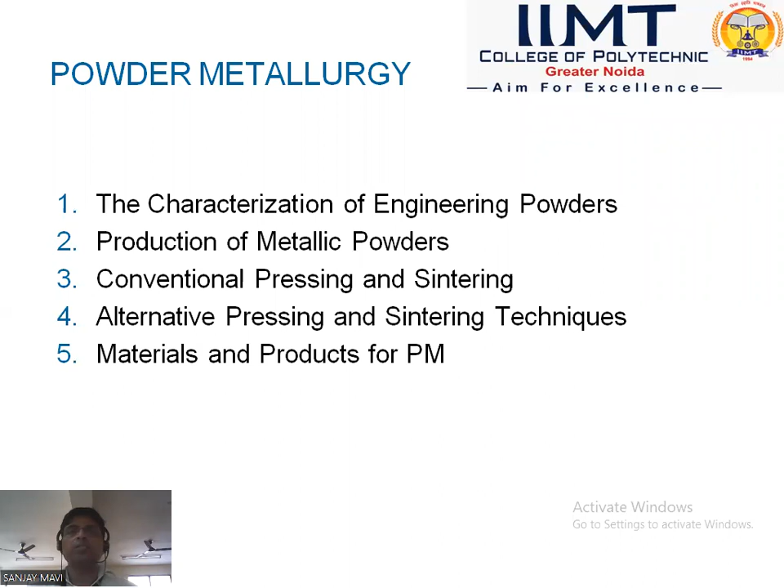Today I will discuss powder metallurgy. The content of today's lecture is the characterization of engineering powders, production of metallic powders, conventional pressing and sintering, alternative pressing and sintering techniques, and at last, materials and products for PM, that is powder metallurgy. Let us discuss all this content one by one.

First of all, what is powder metallurgy? Powder metallurgy is a manufacturing process in which materials, components or parts are made from metal powders. It is a manufacturing process like other manufacturing processes, but here we convert the raw material, that is metal, into powder, then get the final product by the powder metallurgy process.

If we talk about the importance of powder metallurgy, or why we need it, the parts produced by powder metallurgy can be mass produced to net shape, near net shape, or accurate shape. By doing this, we eliminate or reduce the need for subsequent machining. If we produce the part almost in its accurate shape, the other operations needed to bring it into final shape will be eliminated.

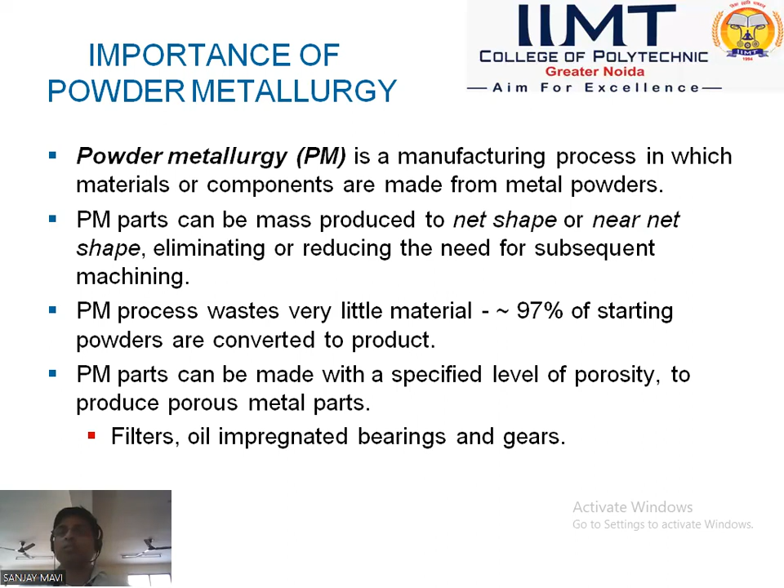Certain metals that are difficult to fabricate by other methods can be easily manufactured by powder metallurgy. For example, the tungsten filaments which we use in bulbs are produced by powder metallurgy. Some alloys, or combinations of alloys and ceramics, called cermets, meaning materials produced from ceramics plus metals, are made by powder metallurgy or PM.

The PM production methods can be automated for economical production. If we introduce automation in PM production, it will be more economical.

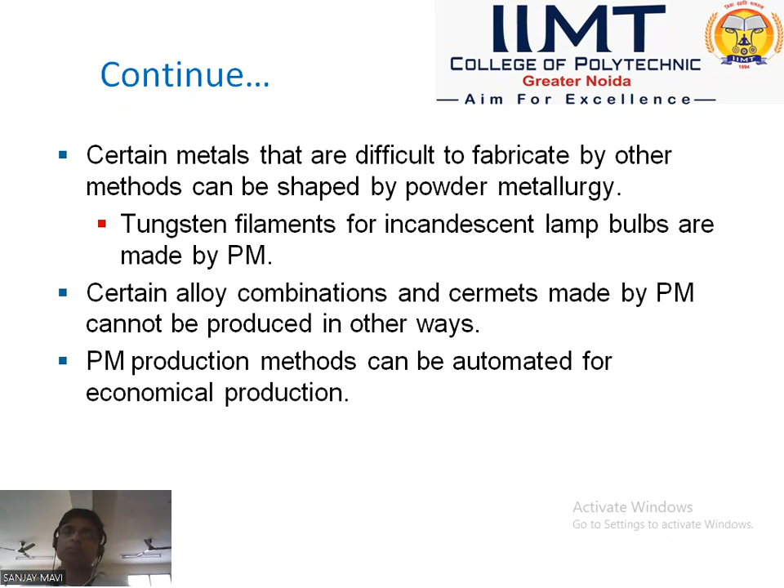Now come to the powders. As powder metallurgy involves powders, let us talk about engineering powders. What is an engineering powder? Powder can be defined as a finely divided particulate solid. These engineering powders include metals and ceramics.

Now come to the geometrical features of engineering powders. These are particle size, meaning the powder matter is made up of particles which have a certain size; particle shape, which is the shape of that particle; and the next is surface area of the particle.

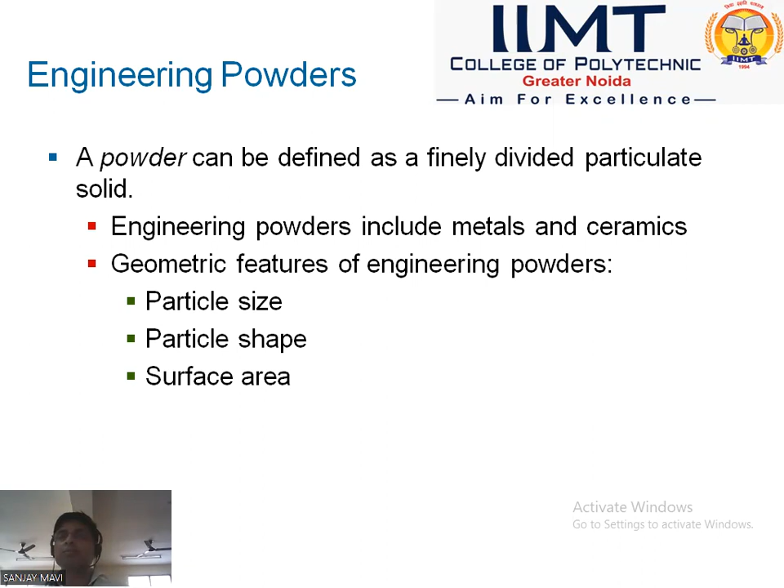The particle shapes in powder metallurgy may be spherical, rounded, cylindrical, spongy, acicular, flaky, cubic, or aggregated. These are all the shapes of the particles that this metallic powder is made up of.

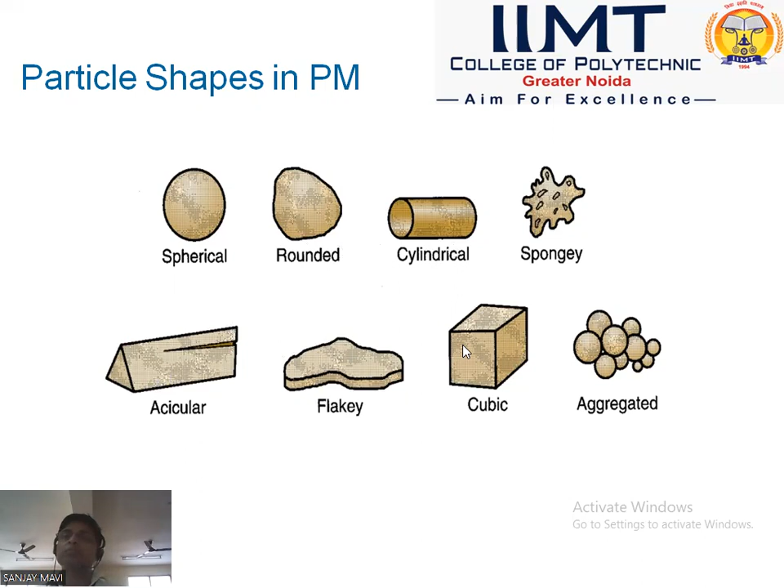Now talk about interparticle friction and powder flow. This is very important in powder metallurgy. Interparticle friction is the friction between the particles of the powder, and it is important because this powder is used to produce the final product. Friction between particles affects the ability of a powder to flow readily and pack tightly. A common test of interparticle friction is the angle of repose, formed by a pile of powder poured from a narrow funnel.

You can see this test here. We have a funnel and we put the metal powder into this funnel and collect it below. The pile of powder makes an angle, called the angle of repose. A larger angle of repose means the interparticle friction is greater; if the angle is smaller, the interparticle friction will be smaller.

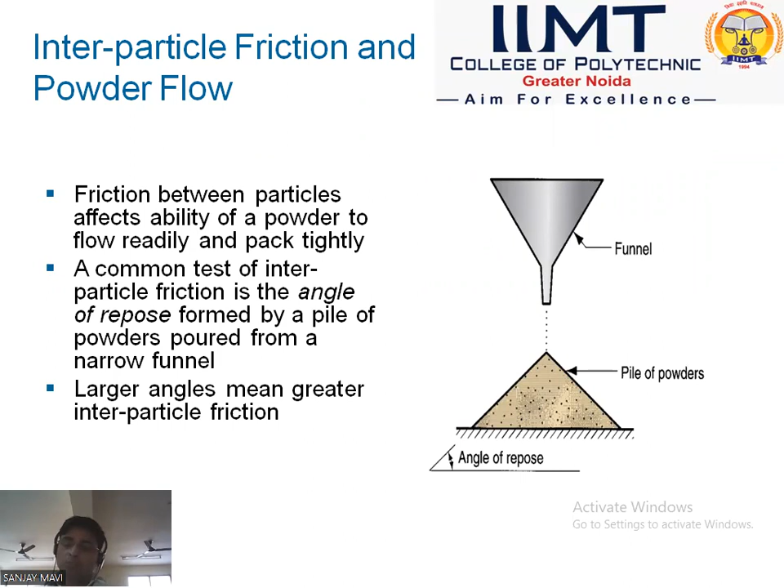Some observations which we have noted from interparticle friction are stated here. Smaller particle size generally shows greater friction and steeper angles. The angle of repose is greater, so the friction is greater.

Spherical shapes of particles or powders have the lowest interparticle friction. As the shape deviates from spherical to other shapes—round, spongy, acicular, as we have discussed—the friction between particles tends to increase. So the shape of the particle should be spherical. If we don't contain the shape into spherical, then the friction should be greater than expected.

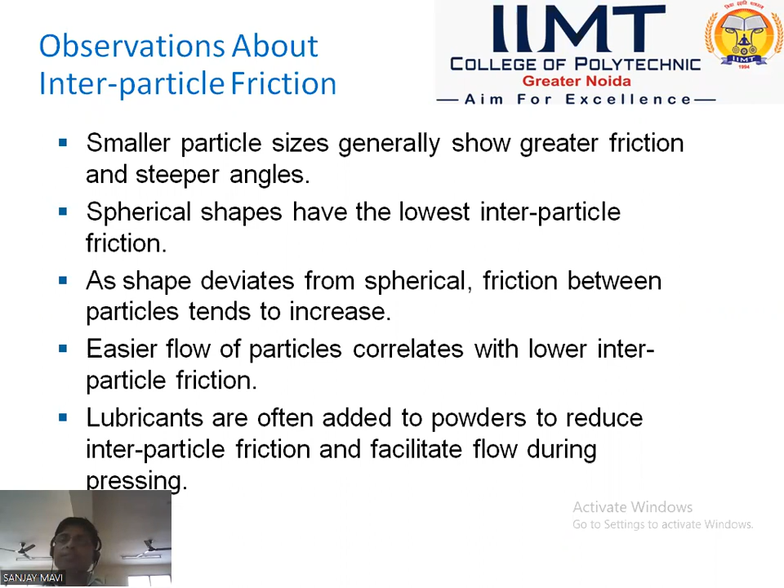Now let us discuss the production of metallic powders. Any metal can be converted into powder form. There are three principal methods by which metallic powders are produced: atomization, chemical method, and electrolytic method. In addition to these three methods, some mechanical methods are occasionally used to reduce powder sizes.

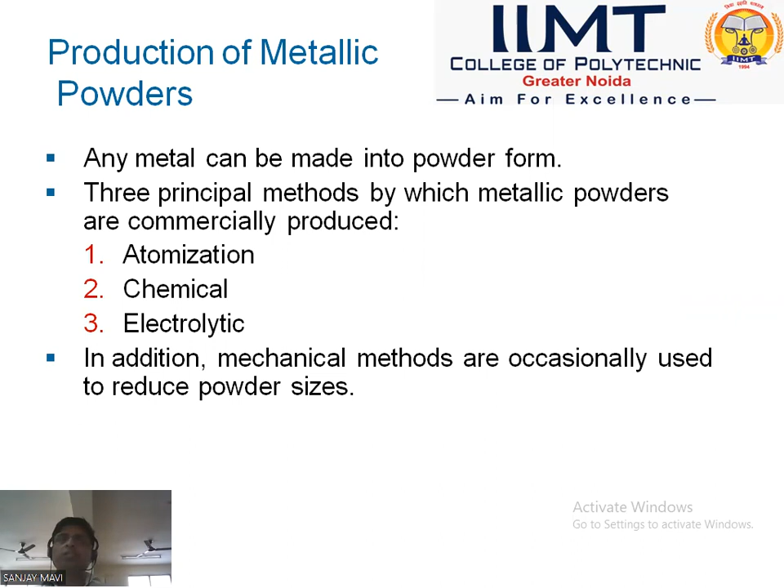Now let us discuss atomization, how to convert the metal into powders. Atomization is a very important method to convert metal into powder form.

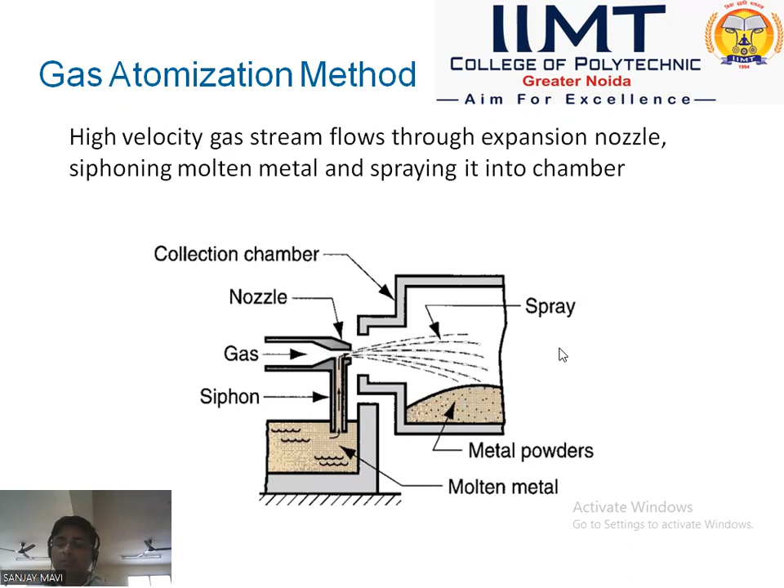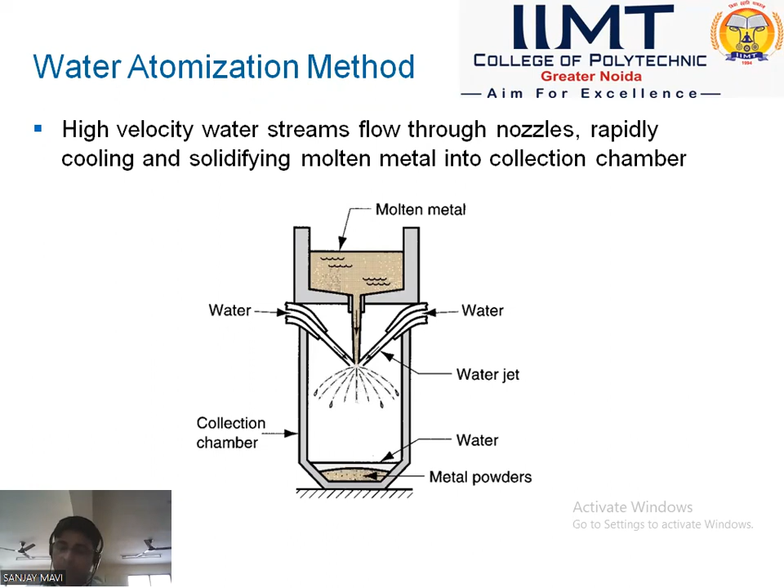Now come to pressing and sintering, which are parts of powder metallurgy. The first part is conversion of metal into powder, then pressing this powder to make it into the desired shape and size, and after that we heat this compacted part below its melting point.

So the conventional powder metallurgical part making sequence consists of blending and mixing of powders. The powder formed in the previous process is blended and mixed during this process.

After that, the process of compaction comes. In compaction, we press the blended and mixed powder into the desired shape, and this shape can be of any shape or size of which we want to produce a part.

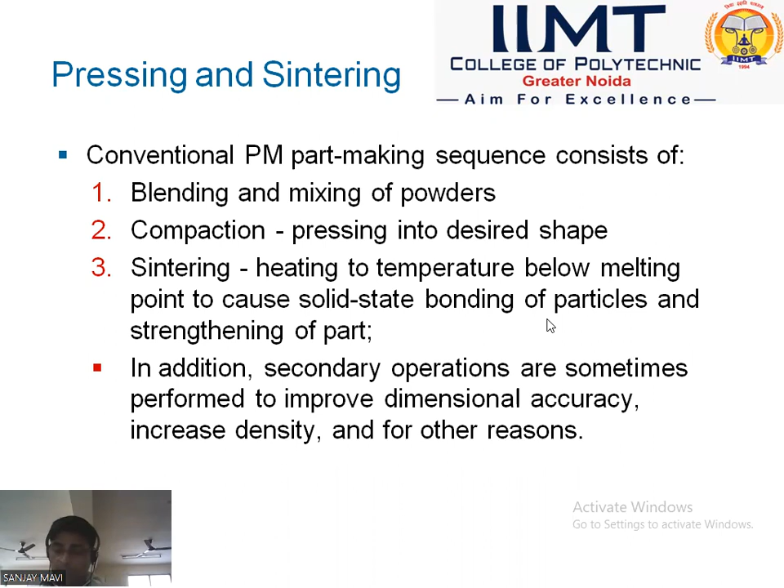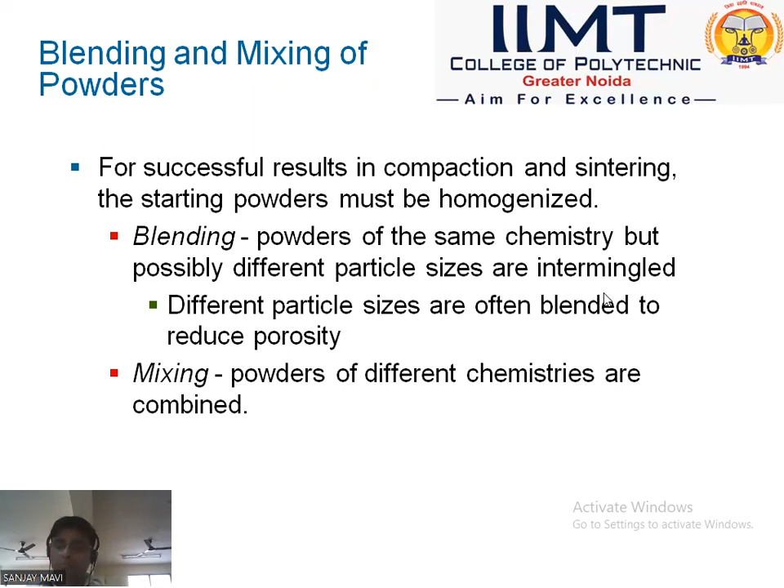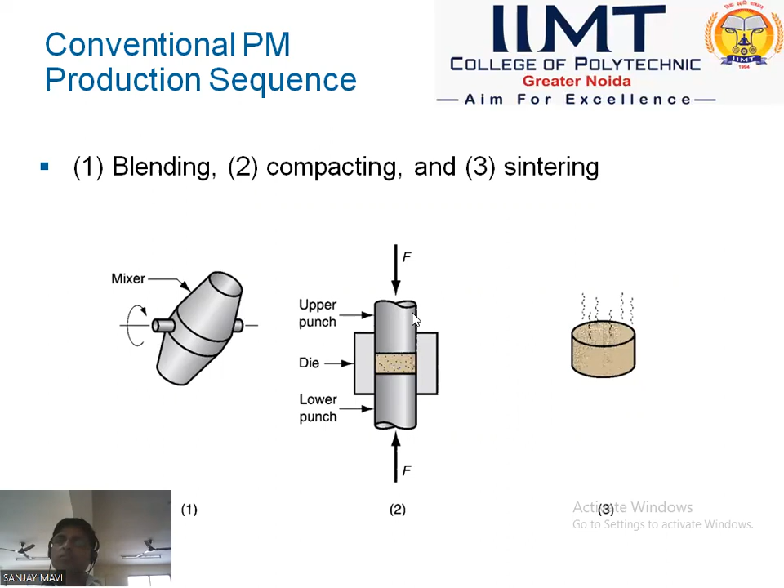The work part after pressing is called a green compact. The part obtained from the compacting process is called green compact until or unless it is heated. So before the sintering process, it is called green compact.

The strength of the green compact when pressed is okay for handling, but less than after sintering. The strength of green compact is lower than the sintered part. So the green compact must be sintered or heated to get high strength.

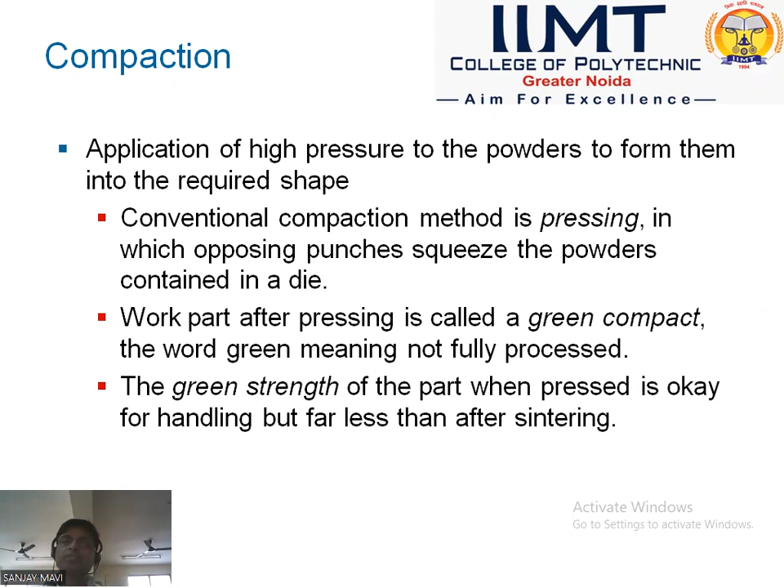This is the conventional pressing in powder metallurgy. In conventional pressing, this is the compact part of the compacting process. Here we put the metal powder in the die. Here is punch 1 or lower punch, and here is upper punch. After filling the die with powder, we press both punches and get the powder into the compact green, the green compact.

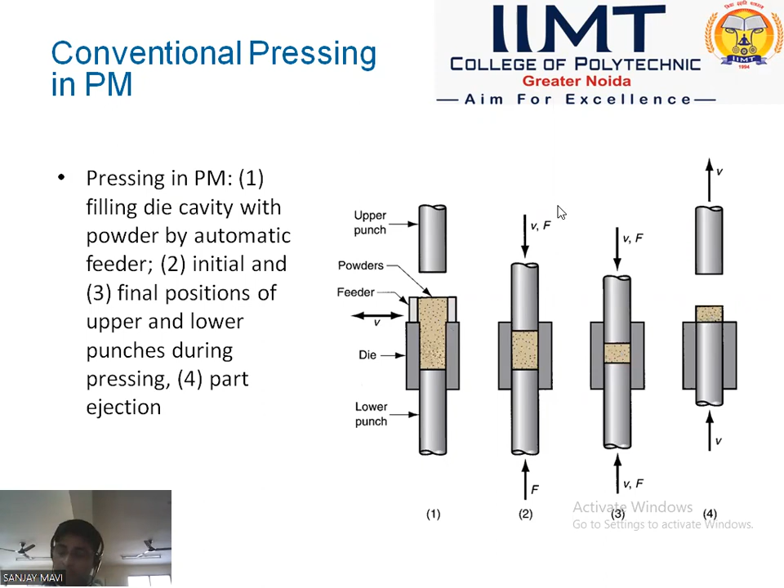Now let us talk about sintering. The heat treatment to bond the metallic particles, thereby increasing strength and hardness, is called sintering. As discussed earlier, sintering is the heating of the green compact to below its melting point.

Usually in the sintering process, we heat the green compact at 70 to 90% of the metal's melting point, that is, below its melting point.

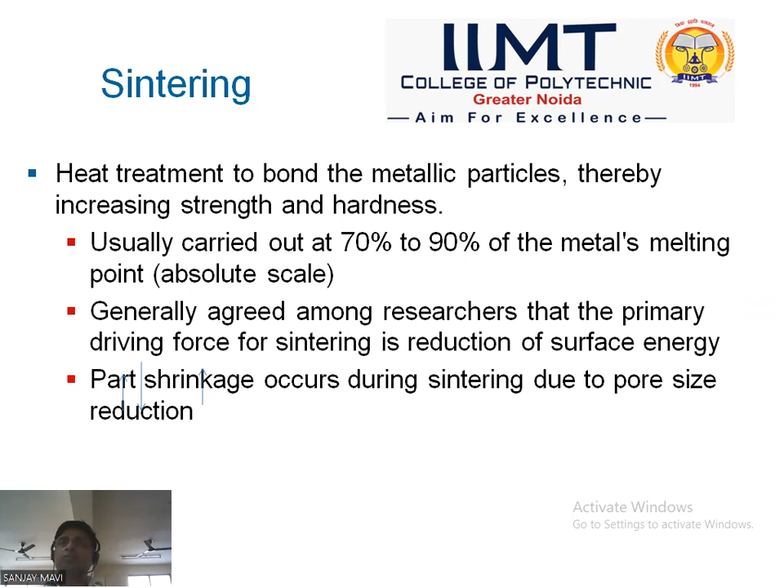Next is the sintering sequence on a microscopic scale. Here we are discussing what changes occur during the sintering process in the green compact. In figure 1, you can see particle bonding initiated at contact point. Here, this is point bonding.

Next, contact points grow into necks. As we heat the green compact, we get necks formed here, as you can see.

After that, pores between particles are reduced in size. After getting the necks, if we heat further the green compact, then we get pores between the particles reduced to this size.

After that, if we increase the temperature again, the grain boundaries develop between particles in place of the neck regions. These are the grain boundaries, as you can see here. This is the sintering sequence on a microscopic scale.

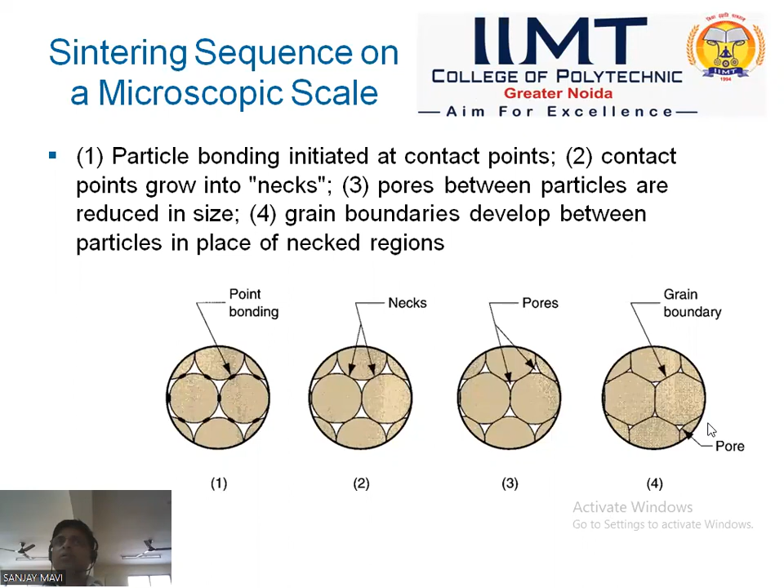Now let's talk about alternative pressing and sintering techniques. Till now we have discussed the conventional pressing and sintering techniques. These are some alternative pressing and sintering techniques. The conventional press and sinter sequence is the most widely used, as we already know.

Some additional or alternative methods for producing powder metallurgical parts include isostatic pressing. In isostatic pressing, hydraulic pressure is applied from all directions to achieve compaction.

Powder injection molding, PIM, is also used as an alternative pressing and sintering technique. In PIM, the starting polymer has 50 to 85% powder content. The total powder content of the metal is 50 to 85% of the polymer, and this polymer is removed before the sintering process.

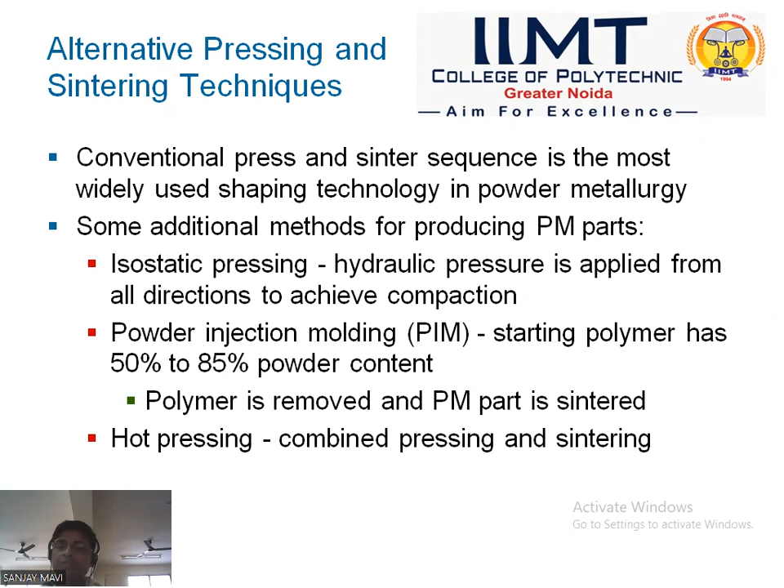Now let's discuss the limitations and disadvantages of powder metallurgy. The most significant disadvantage, or limitation, is the high tooling and equipment cost, meaning the initial cost is very high. The tools and equipment required for the powder metallurgical manufacturing process are very costly, so this is a disadvantage of PM.

The next disadvantage is that metallic powders are very expensive. Metal is converted into powder form to produce parts through powder metallurgy, and this costs very dearly, so it is also a disadvantage.

The next disadvantage is the problem of storing and handling metal powders. Over time, the metallic particles can be degraded. Fire hazards are also a possible concern here.

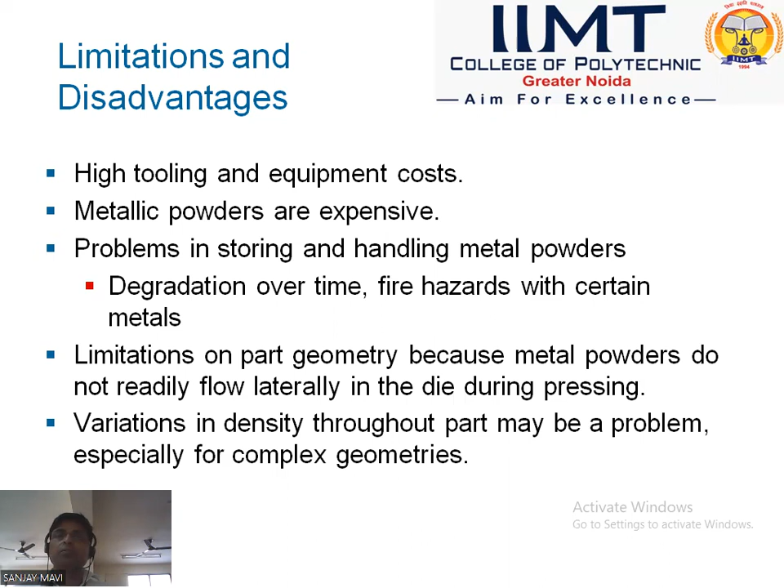Now let's discuss powder metallurgical products, the products produced from powder metallurgy. These are gears, bearings, sprockets, fasteners, electrical contacts, cutting tools, and various other machinery parts.

If we talk about the advantages of powder metallurgy, the parts made by this process are very accurate to their required shape and size. When parts are produced in large quantities, such as gears and bearings, powder metallurgy is the ideal process for manufacturing these parts.